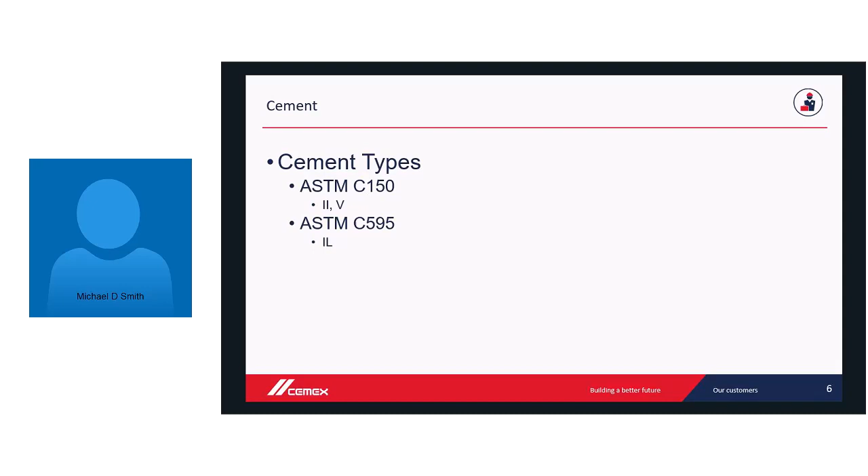Cemex is now producing IL, and I think there's a couple other producers also making IL. It's likely expected to become much more common and probably eventually will replace type II/V. The standard does put similar restrictions on blended cements as C150 does - there's limits on chemistry for certain properties. It's all there in C595.

When you're purchasing cement, you can look at a couple of different factors. One of them is a mill cert. Usually the physical requirements are probably the most important area of a mill cert that you're going to look at. Many producers are required to report the same test results, list them in a similar fashion, so it shouldn't be hard to find.

The physical requirements are going to outline how much heat of hydration the product puts out, and things like how fine the cement is ground. Those will affect how rapid your strength gain is, how much heat is generated. Your set times, the initial and final sets, those become important.

If your initial and final sets don't have a lot of time in between the two of them, that doesn't give finishers or suppliers a lot of time to produce, ship, place, and finish the product. So those could be a factor when you're looking at a mill cert.

False set and air contents - false set is a certain characteristic where once water comes in contact with the cement, it starts to react and acts like it's going to set up and harden right away immediately. Sometimes, depending on whether it's a false or flash set, you can mix through it, but sometimes you can't, so that could be problematic. You look for those higher numbers to be better. The ASTM standard sets a limit on what those can be.

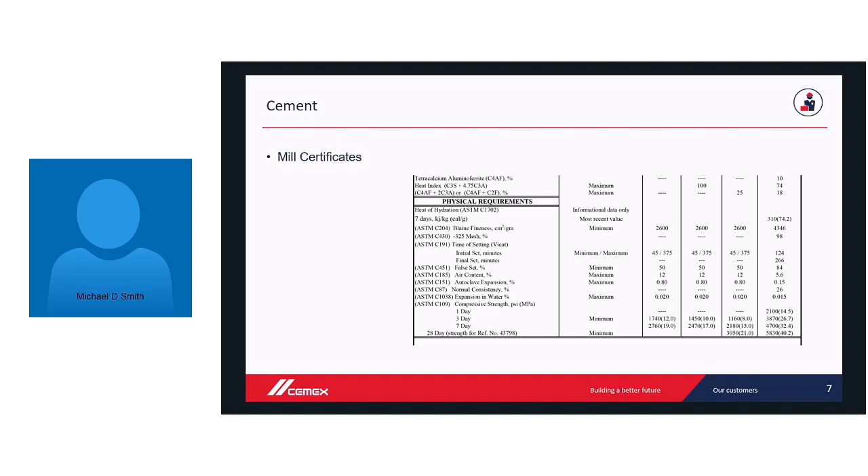The Arizona market, for whatever reason, maybe because of the temperatures out there that they experience, tends to focus more on getting heavy strength early. So it tends to shift a lot of the strength gain into the 1 to 3 day range, whereas out here it's more of a 28-day focus in California.

Another thing that a lot of people don't know about that is available from cement producers is the uniformity report. ASTM C917 is responsible for the requirements for this report. What this basically is, the cement producer takes regular grab samples, whether it's from loading a truck, from the trucks themselves, or from some other point along the chain. They take these samples and make them composite samples, or they could just be one-off samples, but they test these for certain properties.

In this case, I have compressive strength or mortar cube strength here for 7-day and 28-day, and they plot a running average of 5 and then the individual strengths over time. So this is something you could request from a cement producer, and you can use that to correlate your concrete strengths to any fluctuations in production of your cement mortar cube. This is definitely a tool you can avail yourselves of. The cement producers make this available for you on request. You just have to ask for it.

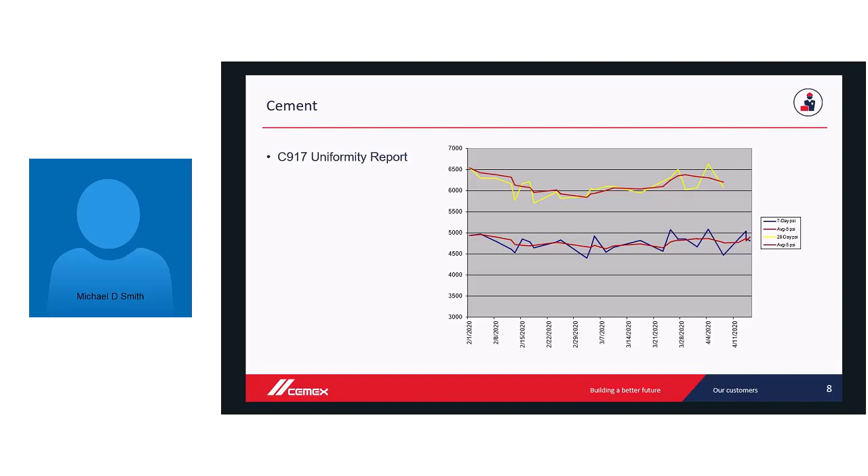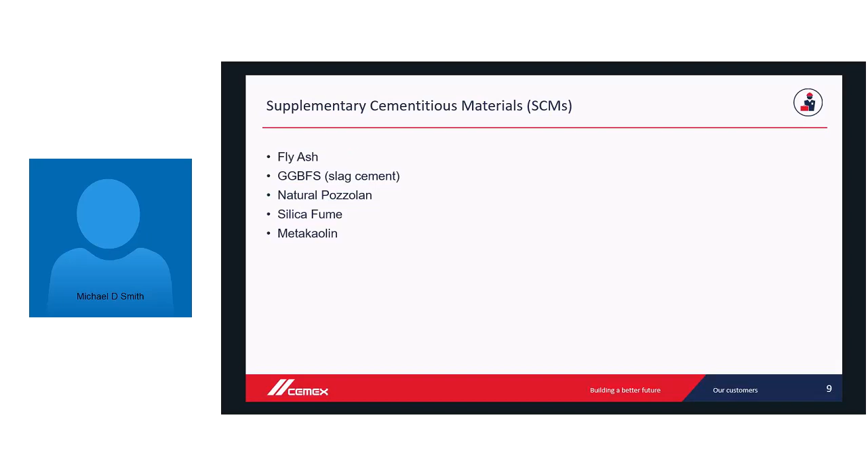So moving on from cement onto SCMs. I'm not going to talk too deep about this, a lot of us know what each of these are. Fly ash being probably the most common, and slag more so recently. Cemex is importing slag, Lehigh has some slag, so there's a couple different sources of slag now making themselves available to this California market. Natural pozzolan, I think, is available. Silica fume is available, not very cost effective, but it is available for certain applications.

So it typically gives us flowability and fluidity out of our mix design with less water. A lot of people like that because you can put less water in your concrete mixes and use fly ash. We're all starting to realize that fly ash is becoming much more scarce. It's based on burning coal, and coal has been kind of the redheaded stepchild, it produces a lot of CO2, and it's getting reduced more and more. There's not a lot of coal power plants, so fly ash is becoming much more scarce. That's why we're starting to see things like slag cement come onto the market.

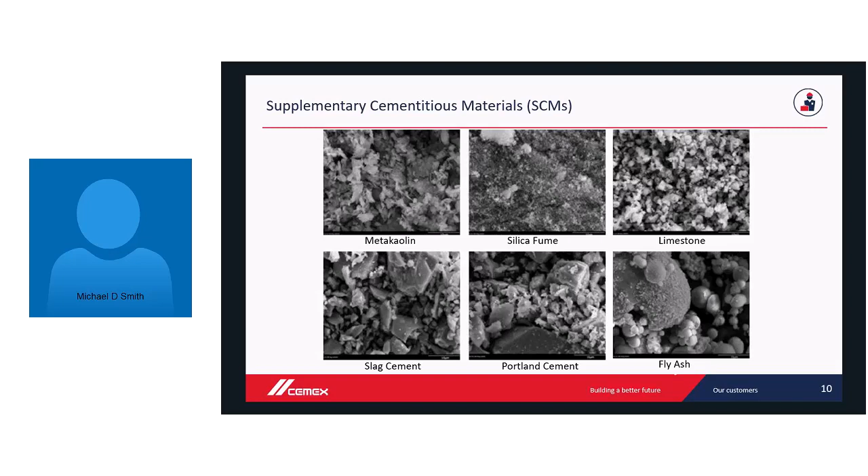You look over here on the left, it's similar to the Portland cement particle in the middle, slightly smaller than a Portland cement particle, and so you can use all these things. Silica fume is extremely small particles, there's many of them for a given unit of volume. These can all be used in conjunction with each other. Again, assuming you have silo space, that's always the problem, is storing multiple different types of SCMs on top of your Portland cement silos. But you can consider these as working beneficially with each other, fly ash and cement, or even silica fume and cement and fly ash, or slag and fly ash and cement. All these can be combined to get various properties from your concrete mix.

So talking about aggregates, the focus of this talk is, and some of the mix design methods I'm going to talk about later, is going to kind of revolve a lot around aggregates. I think aggregates tend to be mostly neglected, or the focus is on other things like water-cement ratios, cement sources, SCMs, things like that. Aggregates make up the largest proportion of a concrete mix design, and they tend to have the biggest impact of a concrete mix.

Their shape, their cleanliness, their grading, if they have elongated particles, if they're angular, they can affect things like strength, flexural strength, workability, how well they pump, how well they finish, change the viscosity of a mix, change the flow rate, how well they go through congested members. Aggregates play an extreme role, and that's why there's a lot of different design methods and metrics that center around how we choose our aggregates, what proportions we use, and things like that.

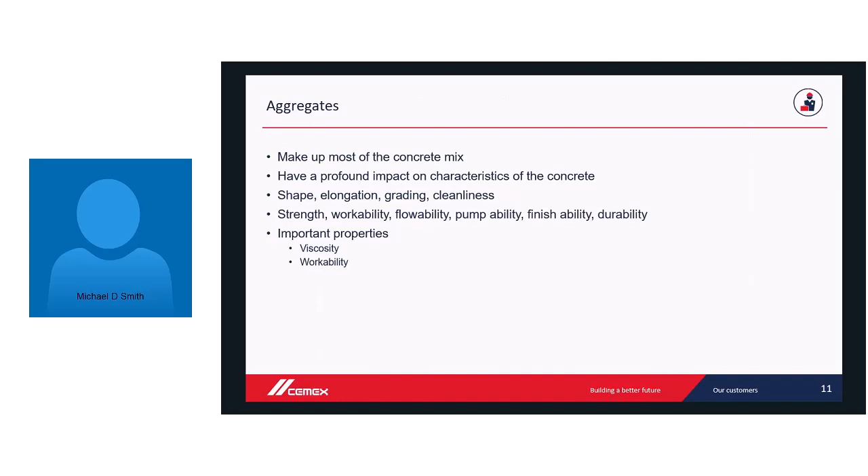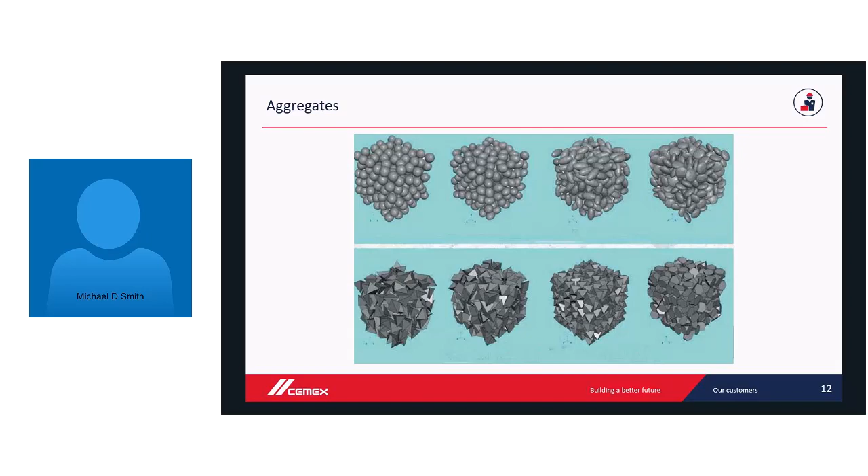Moving on to admixtures - we all know about these. I think the most common would be water reducers. A lot of concrete has water reducers, whether it's a low range, mid range, or small doses of high range water reducers. These are becoming much more engineered - the polymer chains are engineered at various lengths to provide various properties, making the concrete more fluid and stay fluid longer. They come in handy when designing mixes for special applications, or great to just reduce the cost of our mixes by reducing cement and water.

Air entrainers - we get those in there for durability. It's not uncommon for suppliers to use an air entrainer to get a little more fluidity out of their mix design. Small doses of air entrainment help mixes that have really coarse sands or really sandy mixes, giving you a bit of additional fluidity. You have to be careful and balance it, because each percentage of air you include into a mix design is going to reduce your strength, so you find a balance.

There's a couple other things I wanted to mention - slump extenders and viscosity modifiers. These are more specialized admixtures that help you do really crazy things, like pump a mix that's very pasty 60 floors up in a high-rise building. Or if you have concrete that needs to be poured underwater, or concrete with really poor manufactured sands, you can use viscosity modifiers. Those give the mix more body, letting it flow and be more cohesive. Those are seen commonly when you have a poor source of sand, or need to make it hold together underwater. So there's a lot of different crazy things we can do with concrete that help improve mix design.

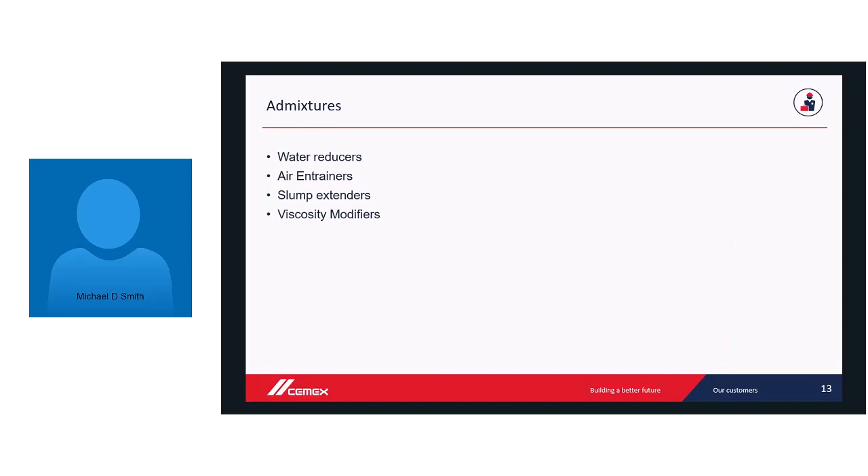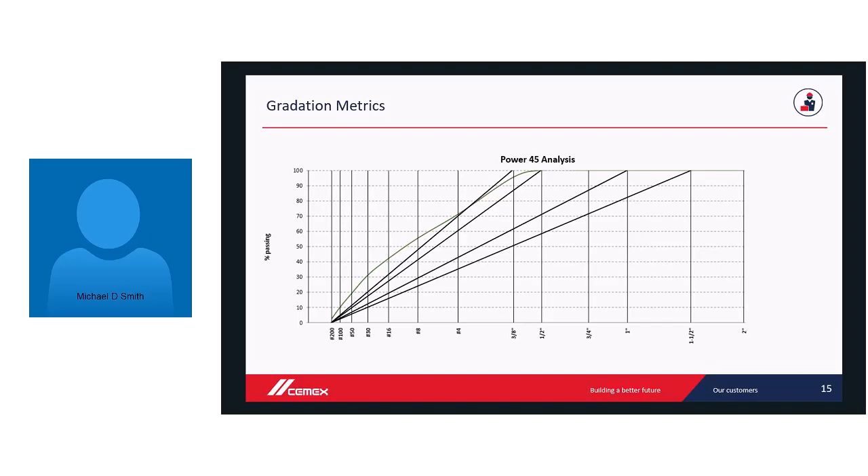That's probably something more geared towards a paving mix or something low slump - max density, or roller compacted concrete, will generate really dense, compact mixes. But in most other applications, like ready mix and wet batch, we probably want to keep it a little on the finer side. The finer side would be towards the upper left - anything that pushes above that line is pushing towards the finer side, and anything that falls below is more coarse. Another thing you can use this chart for is to tell you whether you have any gaps in your gradings, or any peaks or valleys. If you have too much on a particular sieve, you'll see a peak in whatever sieve that ends up being, or you'll see it drop off if you don't have enough on any given sieve.

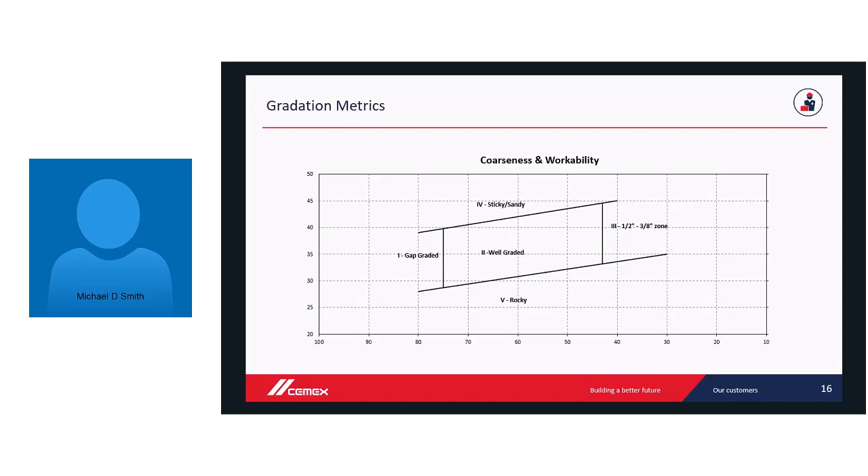A lot of studies and research on this tend to show that it's not very accurate. The charts we're going to look at next tend to be more favorable based on a lot of the testing done. It's shown that the results you get in the field don't correlate as well with this chart as some others.

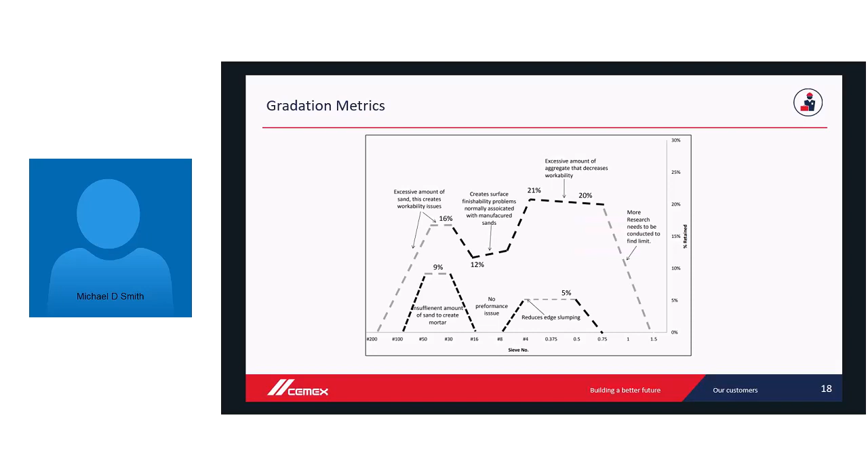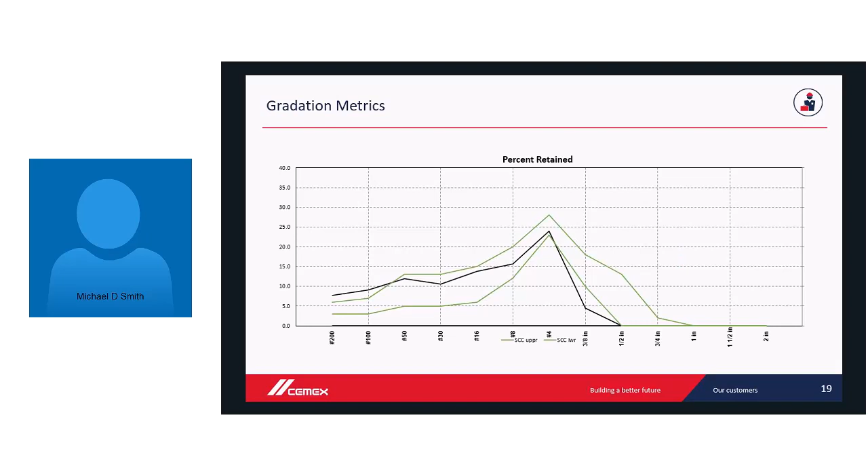So this is just another modification of the percent retained chart. Those are the metrics, and like I said, I'm going to cover a couple of different topics or different design methods.

The most basic one is ACI 211.1. Let's see if I have it here - standard practice for selecting proportions for normal, heavyweight, and mass concrete. These are available on concrete.org. I think they charge for individual PDFs of these, or you can pay for a service to get access to all of them for a year.

This is a good starting point if you have no prior knowledge. You don't know your mix characteristics, you don't have prior existing mixes, you don't know your aggregate sources, how they behave, any proportions. This is the starting point for not having any body of knowledge to work off of.

Generally, you're going to have a history of mixes and proportions that your company or supplier has used in the past, if you're a mix designer, that you can reference. So it's not very common that anyone goes back and refers to these ACI methods or standards, because they just start with existing mixes and modify those to get whatever properties they want.

But that's why I wanted to go through this, and then I'll show you another method that's newer, that ACI put out a journal on. We'll talk about that.

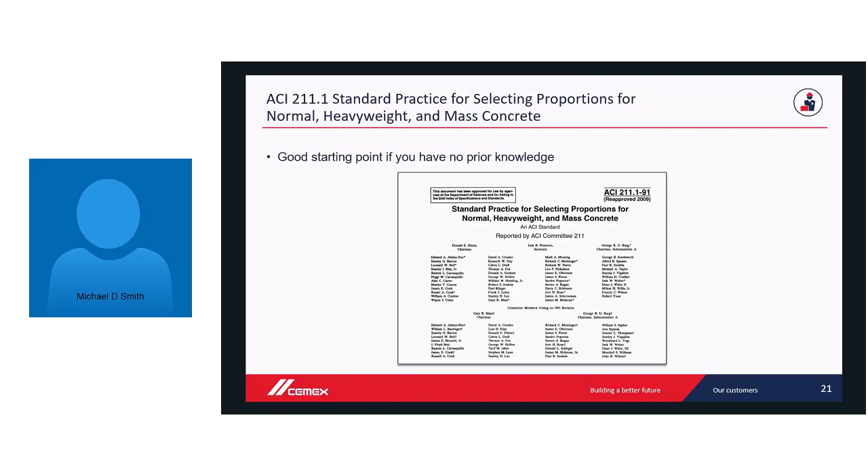Before we talk about the design steps, it's important to note that there are two different types of ways of specifying a concrete mix design: prescriptive versus performance. I'm going to talk a little bit about what that is. You may even see specifiers combine prescription and performance together - they may have certain aspects of one and the other when they write their specs.

So basically, prescriptive is when the specifier states that they want you to achieve a certain water cement ratio, a minimum cement content. They may even specify how much SCMs and which types you can use, admixture doses, things like that. Essentially, the specifier is designing the mix for you, telling you what targets to hit.

Performance is that the specifier is stating that they want the mix to achieve a certain level of performance - they may state that strength has to be 5,000 psi, slump is 4-inch plus or minus, whatever. So that is performance-based mixtures. Now, like I said, you may see some specs where they just state they want the mix to perform at 5,000 psi, but then they also state a minimum cement content and water cement ratio, etc. So you'll probably see some combination of the two.

Now I included this in here - this is a reference to ACI 132R, the guide for responsibility in concrete construction. I've often, when I was in the design field, had a lot of issues with some specs being either contradictory or having unreasonable expectations on the mix design. And that's why I wanted to include this in here.

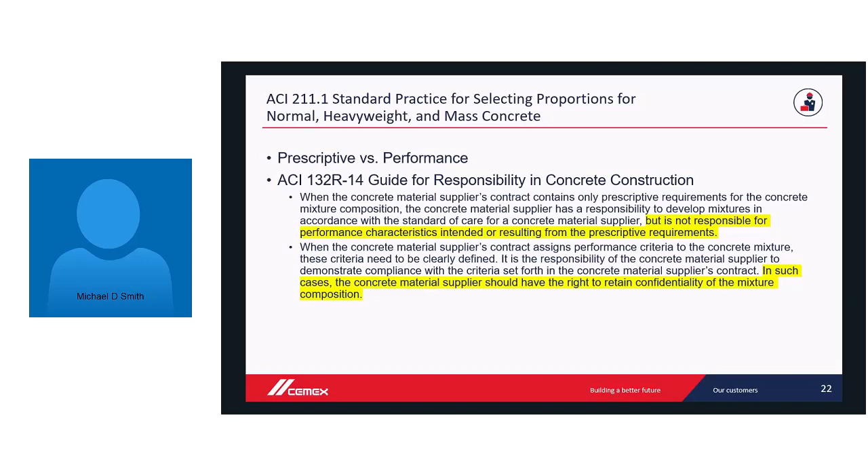So there are certain circumstances, and sometimes it's very difficult. Many years ago, I managed to convince LA County or LA City to accept a mix that just stated it complied with certain standards - basically like a certificate of compliance. The mix stated that it complied with the standard for cement, for SCMs, for aggregates, but it didn't spell out any actual weights or specifics of the mix design itself. We were responsible for the performance. They accepted the mix as it was, but it didn't have any specifics of the design. So it can be done. It's difficult in a lot of cases, but you do have some rights to confidentiality of your mix design, especially if you're doing a lot of research and development and putting effort into those designs.

So moving on to 211.1, that document is going to have step-by-step instructions of what you have to do to design a mix. It usually starts with getting the basic information down, such as: is the slump specified? Is there a maximum aggregate size specified?

Those choices are going to depend on what the concrete is being placed or used for. Elements of high congestion are very narrow elements - you can't pick a very large aggregate size, so you have to reduce your aggregate size depending on factors like that. The performance requirements that should at the very least be specified, or that you should know based on the application, whether it's a 2,000 psi backyard slab or a 9,000 psi column mix in a high-rise building - those performance requirements should be spelled out.

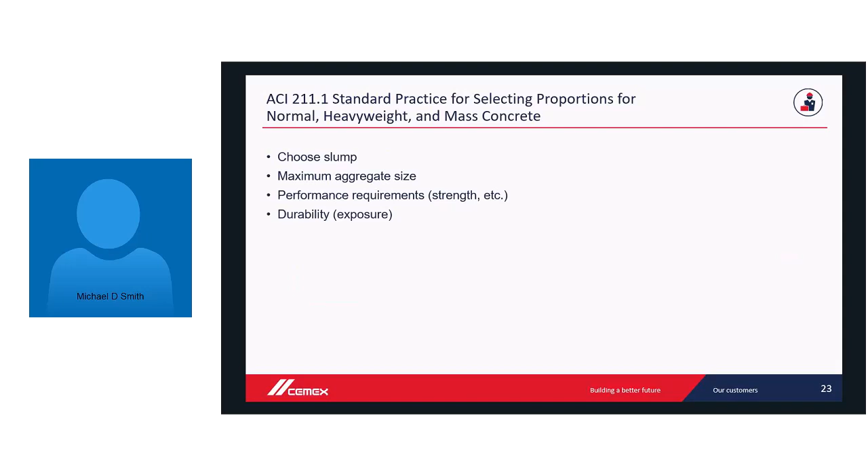And then exposure is another common criterion. Durability - whether the concrete element is going to be exposed to a freeze-thaw environment, sulfate environment, or high chloride ion concentration environment - those factors are going to come into play and will change how you determine your mix design. It'll change the water cement ratio requirements, whether or not you need to include certain SCMs into your mix. Those will either be specified, or you should have some information on what those requirements are for your mix before you start.

Now, if you have an exposure situation - mild, moderate, or severe - you're going to have to increase your air content, add in air entrainment, and bump up the air. That's going to reduce the amount of water you need in the mix, because adding air entrainment adds some fluidity. All those little bubbles act like little ball bearings, giving you some fluidity, so you don't need as much water in your mix design. So this gives you a starting point. Once you determine this, you can calculate your cement content from your water content and water cement ratio in the next slide.

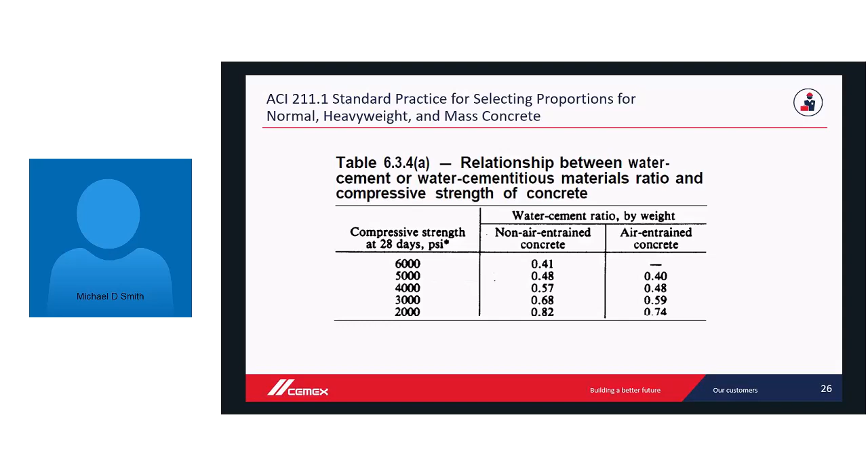Now, like I said before, I'll emphasize that this is generalized. Your individual materials, different markets, different areas are going to have different cements, different aggregate sources. They're not always going to apply, but this is a good starting point if you had no basis. So say you're going to do a 4,000 PSI mix, you'd target a 0.57, and then you can go back and interpolate to see how many pounds of water and how many pounds of cement that's going to be.

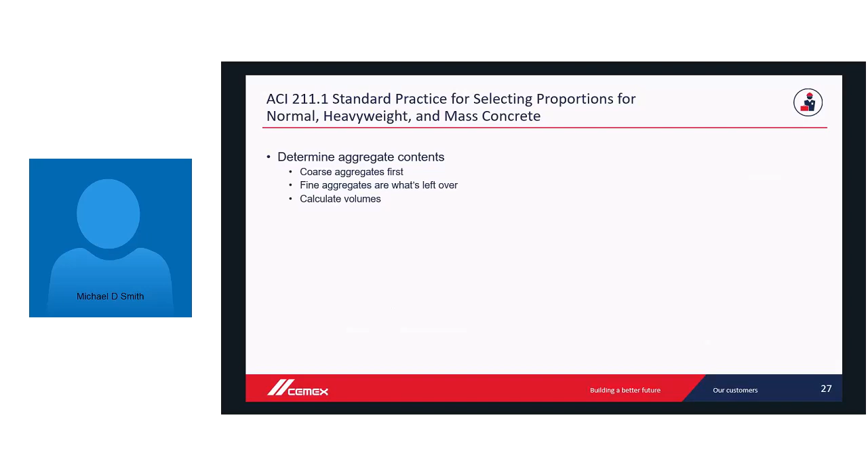Once you've got your performance characteristics, your cement and your water, nailed down, then it's on to figuring out your aggregate contents. Coarse aggregate, you're going to start with that first, as it's probably the most important factor for your design.

The way that ACI does the choice of coarse aggregate content, or how many pounds you're going to use in a mix, is based on your dry rodded unit weight. So you would take your coarse aggregate and put it in a bucket—there's a whole standard for doing this, ASTM C29—and determine the dry rodded unit weight of that aggregate.

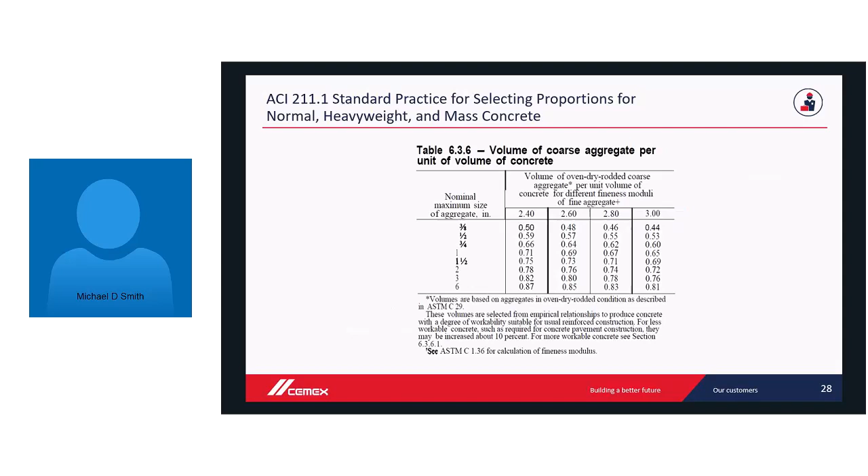Then you'd also calculate the fineness modulus for your aggregate. Fineness modulus is another way of determining how fine or coarse your material is. You add up a certain number of specific sieves and divide by 100, and you get a factor, usually a number between 2.4 and 3. Generally, ACI limits mixes to 3, anything higher than 3 is considered too coarse.

Once you determine that fineness modulus, it gives you a factor based on whatever aggregate size you're using, and then there's a formula you apply. So, say if we're using 1 inch and it's a 2.6 fineness modulus, you'd multiply 0.69 by the volume you're designing for—in this case, a cubic yard of concrete is 27 cubic feet. Again, this gets pretty deep into the calculations, but ultimately it gives you an amount of aggregate.

You do the formula and come up with, say, 1,400 pounds of rock, and then you take that number. If your design is based on SSD, saturated surface dry—basically the amount of water that coats the aggregate—this result is based on a dry weight.

So if your aggregate had some moisture on it, which most of the time when you're batching concrete it does, and your design is based on that moisture coating the aggregate, you'd want to increase the weight of your aggregate based on its absorption of water. It can get pretty minute going into all the specifics, but more or less you can change this from oven dry rock to include the moisture in it when you're doing your design.

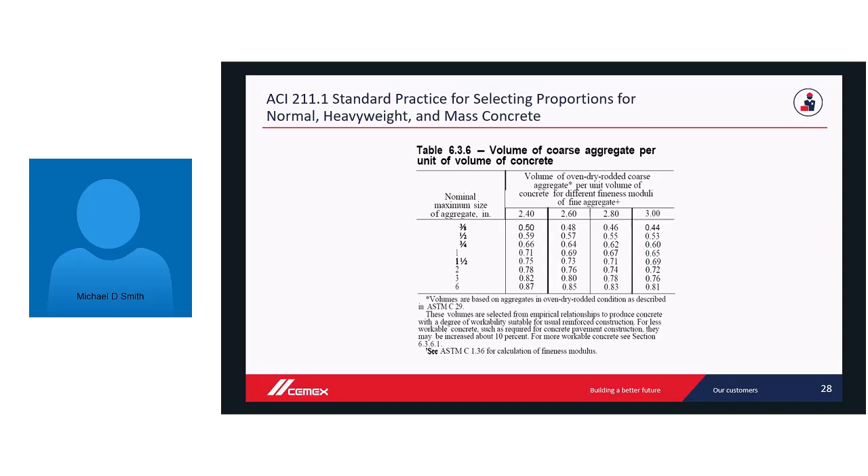That is basically ACI 211, the very generalized way of doing a mix design with no prior knowledge. Again, if you have mixes that you already know perform—say your 0.50 water cement ratio mixes at 50% coarse aggregate and 50% fine are just fine all day long—you can just start with those mixes and make your mixes based on that. This is a general tool to do a design from scratch.

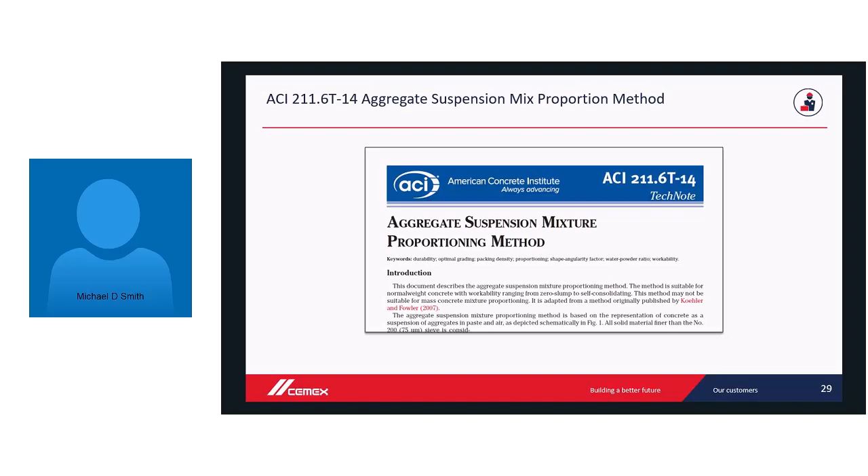So the other method I wanted to talk about is this one here, called the aggregate suspension mixture proportioning method. It's kind of a newer way of looking at mix design. I figured I'd provide the basic bread and butter way of doing it, and then talk about this modified version of doing a mix design.

This method is suitable for anything from a normal weight concrete mix all the way up to self-consolidating, very flowable concrete, so it covers a wide range of applicable concrete mixes. It's based on packing density, and uses tested, correlated data between your aggregate grading, particle shape, size, and the angularity of the aggregates themselves.

It uses that to determine the minimum paste you need in your mix. Then you add a little additional paste because, again, like the bulk density or the Power 45 curve we looked at before, you don't necessarily want to target a perfect maximum density for everything. You always want to pad it with a little extra paste or powder to make the mix more flowable, more fluid, and easier to place.

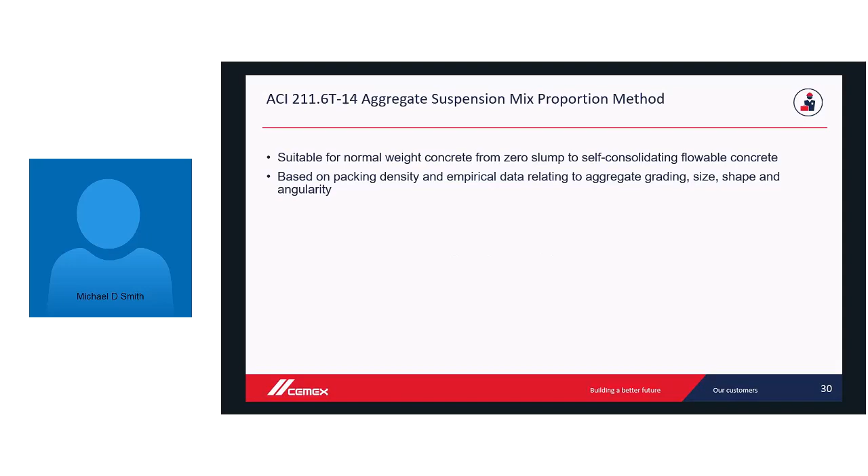So it starts with figuring out the minimum paste to fill all the voids between the rock, to provide enough suspension between rock particles so they're not rubbing against each other and causing fluidity or workability problems. Then it pads that with additional paste, allowing you to generate a different design.

So it looks at a mix in two different ways: basically the aggregate system, and then that system suspended in paste. You select an aggregate proportioning.

You use some of the tools I talked about earlier to determine what ratio of aggregate you want to use, or a proportion you know works well with your local materials. Then you do some calculations to figure out the minimum paste content, and pad that paste content a couple percentages to get workability.

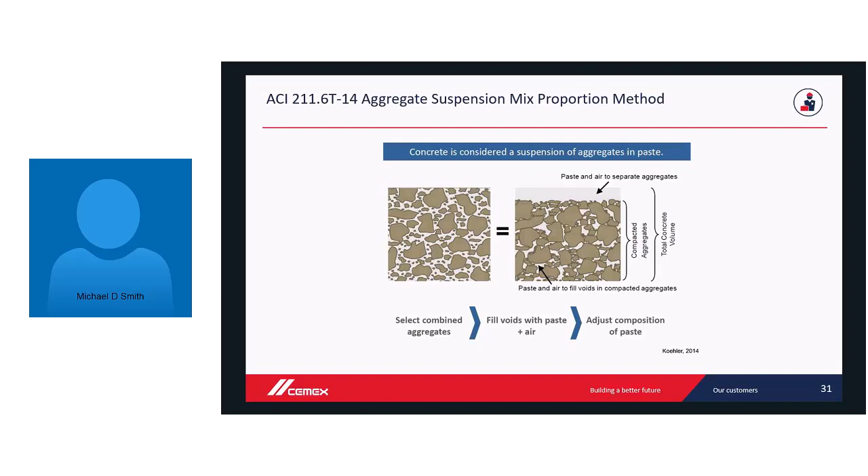And then you'd want to test and look at the characteristics, and retest if you can, to fine-tune and adjust your mixes so you make an efficient mix that does what it's supposed to do, using a minimum amount of paste to keep your costs down for the mix design.

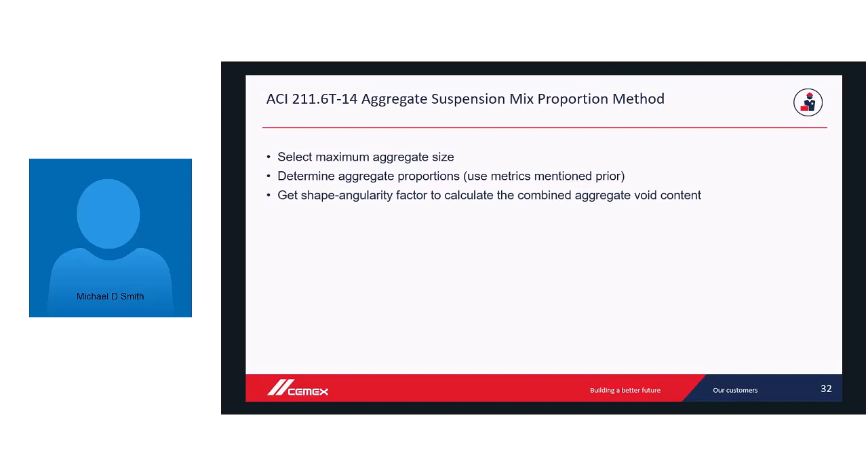So a lot of the steps are similar to ACI 211. You select a maximum aggregate size, and determine a proportion using whatever metrics you're comfortable with—you can use the Power 45 curve, or a known ratio of coarse and fine aggregate you've used in the past. Then you use a factor that the standard, or journal, provides for calculating paste content based on the aggregate voids and the shape of the aggregates themselves.

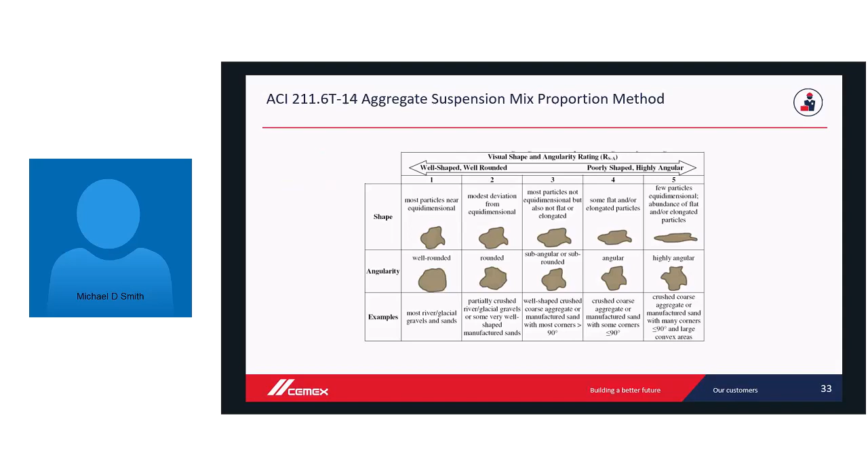So in that journal, there's a table listing a factor you'd choose based on how you visually assess your aggregate. If it tends to be rounded river rock material—well-rounded, kind of equidimensional—or from the other end of the perspective, highly angular, elongated, crushed rock, you'd rate it between 1 and 5 depending on how your material behaves.

This test method also uses the dry rodded unit weight test, C29, but in this case you'd take your aggregate proportions and fill the bucket with all the materials together at the proportions you chose, and get the resulting density. That density then gets used later in formulas to calculate your paste content.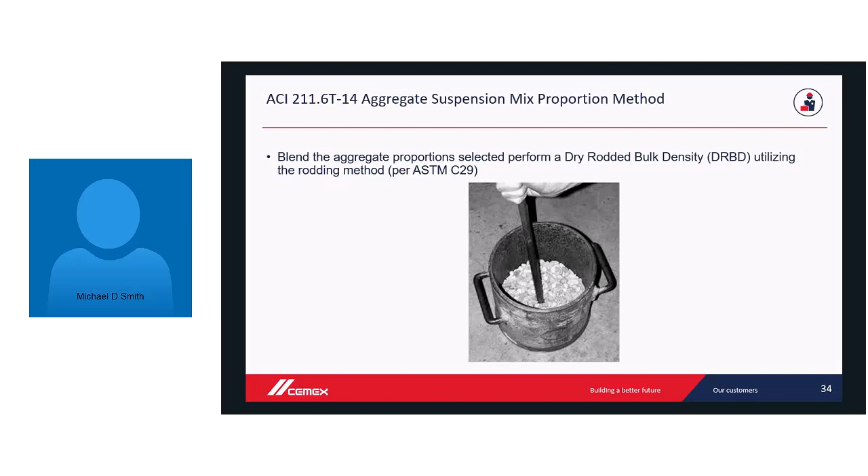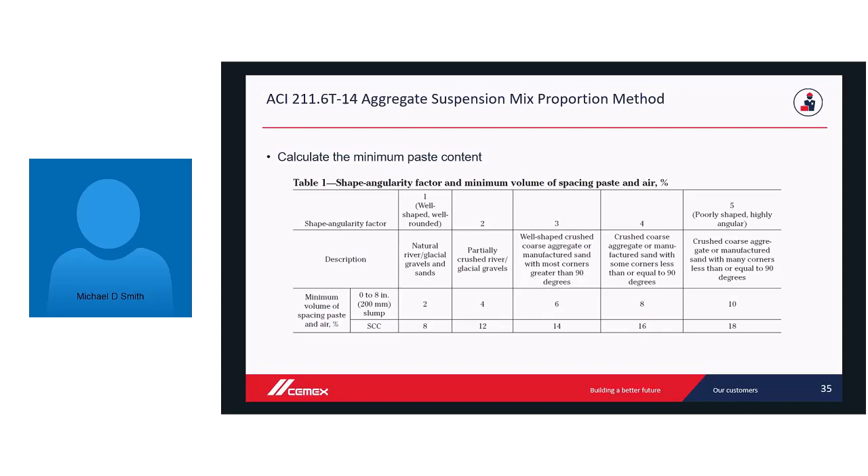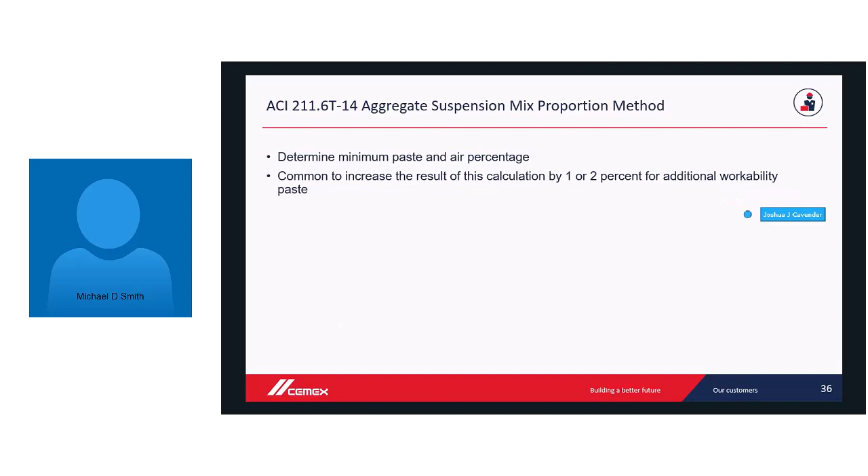Once you've done that, there's a formula in there—I spared you guys the big formula for calculating all this out, but you can go visit that journal if you're interested and want to look through it. You do that formula, calculate your percentage of paste, and then generally add 1 or 2% on top of that to get your workability and flowability of the mix.

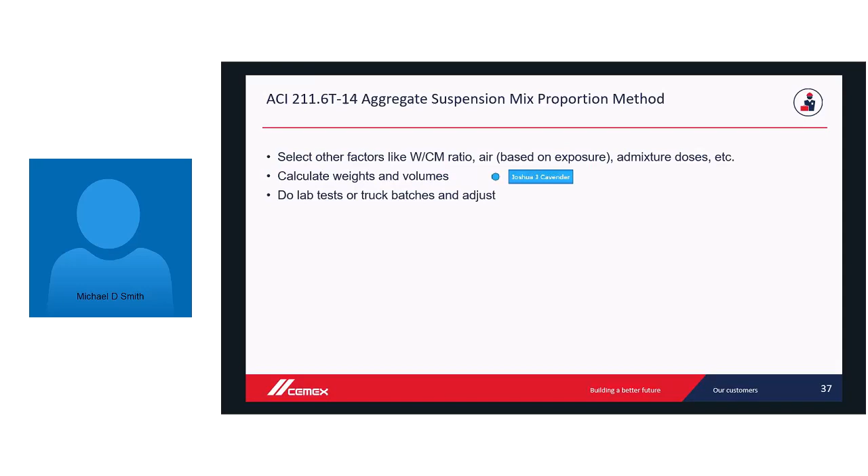Once you've taken that and gotten a percentage of paste based on the volume you're designing on, per cubic yard, you can back-calculate and figure out, based on the other parameters of the mix—whether it's a 0.50 water-cement ratio, or exposure situations needing 6% air, and certain admixture doses to get your slump—you'd calculate your weights and volumes off that percentage, and then do some lab tests and batch.

One thing I don't see happen very often by suppliers or labs is, when they do batch mixes, there's not a lot of visual inspection of the mix. They'll do the common air test, slump test, strength cylinders, stuff like that, but they don't note anything about what it looked like—was it segregating, was it coarse, did it look real sandy or sticky? So one thing to do is go observe your mixes, not only with the other test methods, but visually inspect them.

If it's an SCC mix, you often look for the halo around the outside of the concrete flow, or a buildup of rock in one specific spot. Same thing with a normal mix too.

Then you can go back and adjust—either reducing your sand, increasing your rock, adding an SCM or removing an SCM, reducing the percentages, things like that—or start adding admixtures that help provide a bit more viscosity or something similar, so you can improve these properties and fine-tune your mix to have the most efficient mix possible with the least amount of cement powder possible, reducing your cost but still getting the same performance.

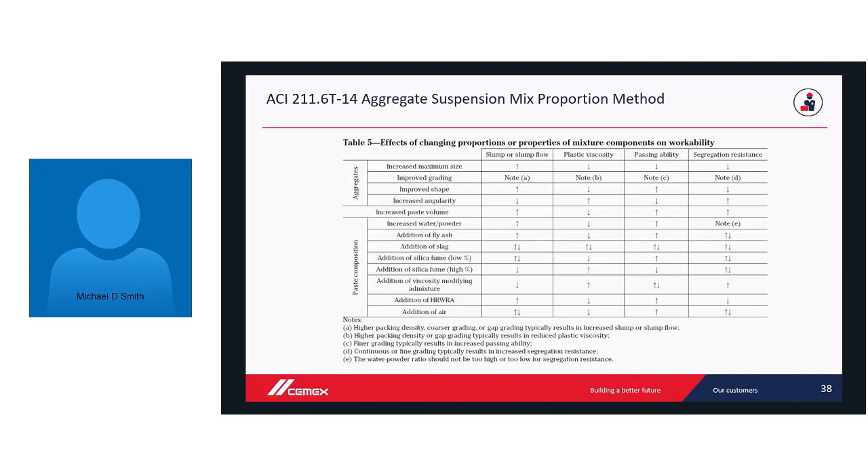Because oftentimes you can meet all the requirements for a spec, but then you may have a really coarse, harsh pumping mix, and you don't find out until the product gets on the project, and then you're having to deal with issues day of. So it's equally important to do visual inspections of a concrete mix in addition to the normal tests you do. So that covers the two different methods and some metrics.